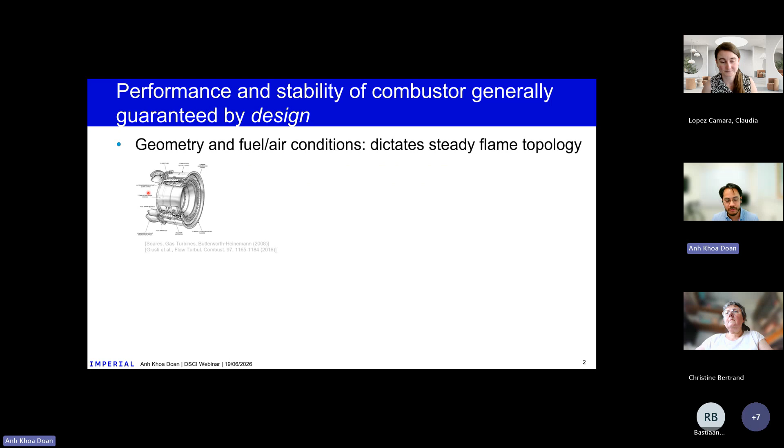In general, when we design combustors, we design their geometries and fuel-air conditions. For example, here we have an annular combustor, but the way we design it is that we design the fuel injection systems, the airflow systems, and the geometry of the combustor such that we obtain a stable flame with appropriate efficiency and power generation characteristics.

The thing is, once the combustor is designed, it is generally meant to operate in a relatively narrow range of fuel-air conditions and operating conditions. That means these kinds of combustors have limited adaptability to operating outside of their design conditions, or the conditions for which they were designed. So that's the situation we're in.

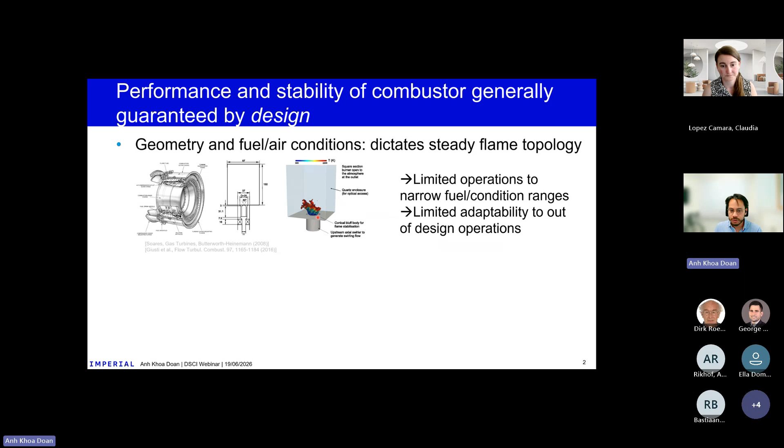In parallel to this, in relatively recent years there's been investigation into implementing some form of actuation available in combustors. For example, Pratt and Whitney are exploring adding steam injection into combustors to improve the efficiency and stability of hydrogen combustion. That gives us an extra degree of freedom while the combustor is operating, beyond just air-fuel ratio or injection speed.

This, for example, could be used to prevent potential flashback, which will be one of the topics of today's presentation. Another aspect recently investigated by a colleague at Imperial College, Andrea Giusti, is the potential of using an oscillating electric field to control the trajectories of charged fuel droplets. That can potentially give us control on specific fuel stratifications, which can then be leveraged for different kinds of geometries.

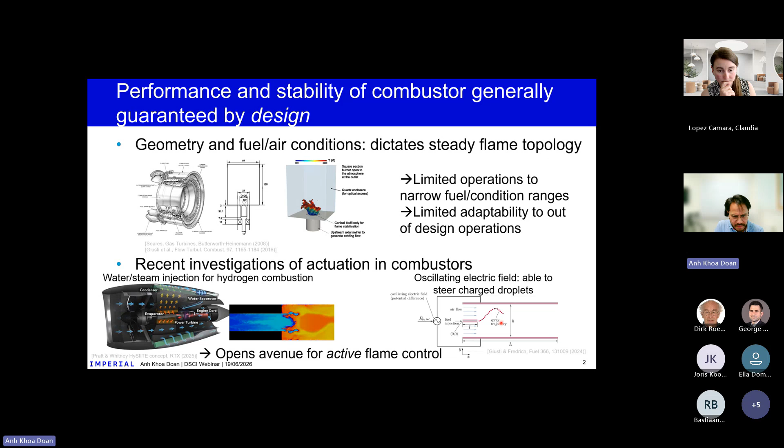So that sets the stage for potentially having means to actuate the flame beyond the point when the geometry has been set up. But there are many challenges before we can actually do that, because we encounter the natural challenges of turbulence and turbulent flames, where the dynamics is extremely complex due to the chaotic dynamics of turbulence and the interaction between chemistry and flow and turbulence, which is complex to predict.

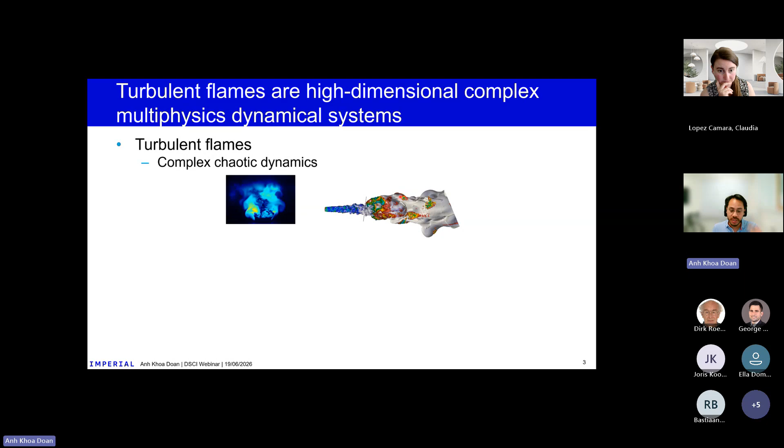In the context of future clean fuels, we have added complexity because hydrogen and ammonia can exhibit what I call extreme behaviors. For example, hydrogen is susceptible to flashback, and ammonia is susceptible to blow-off due to its low reactivity. So my research, and the topic of this presentation, addresses this combination of complexity in turbulent flames with sustainable fuels, which generally limits the performance that can be achieved using traditional control techniques.

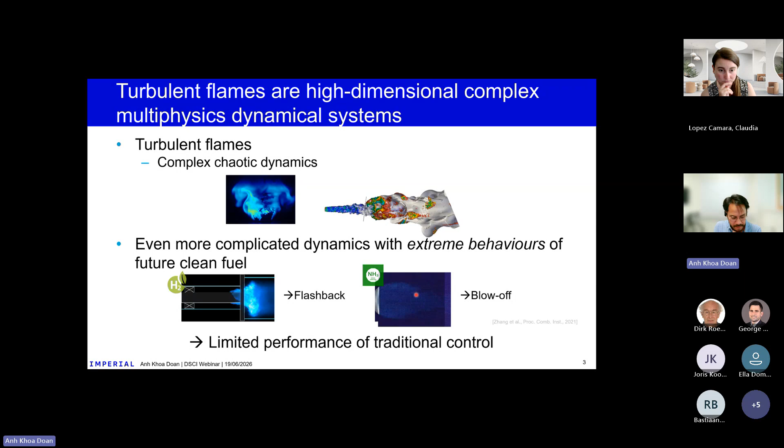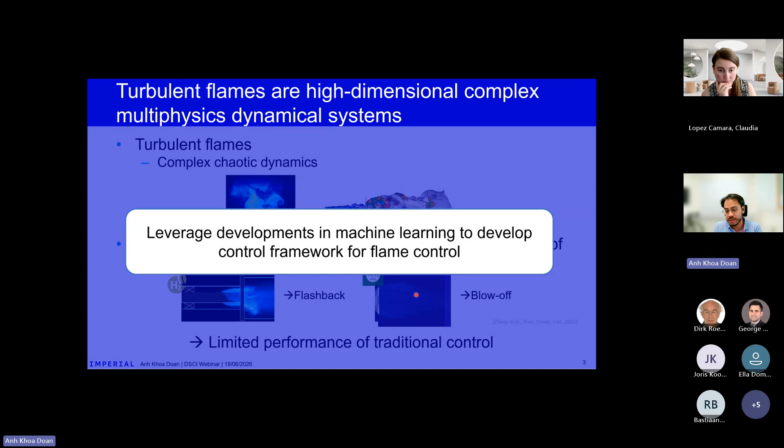So the objective of my talk and my research in general is to leverage these developments in machine learning techniques to try to develop control frameworks in this context of flame control, now that we have potentially some actuation possible in our combustors. So there will be 3 different topics.

The first one will be on the development of machine learning techniques to prevent flashback using water injection, as I've already mentioned. The second one will be related to how we can develop machine learning techniques to control the fuel stratification we obtain if we have charged droplets, meaning how we can control and find optimal electric field parameters. And the final one will be more on numerical developments where we try to develop a differentiable flow solver that can act as a unified control development framework for flame control.

So let me start with the first topic. This one has been done in collaboration with Mitna, Pablo, and Ivan Langella from TU Delft, and also our collaborator at IISc, Aditya Konduri.

So what do we look at in terms of flashback control? We have these combustors, meaning that, as I mentioned, I assume I have some actuators available in my combustor - some water injection systems. And if I have actuators, I have to have an idea of when I should activate them, which means I assume the presence of some measurements in our combustor.

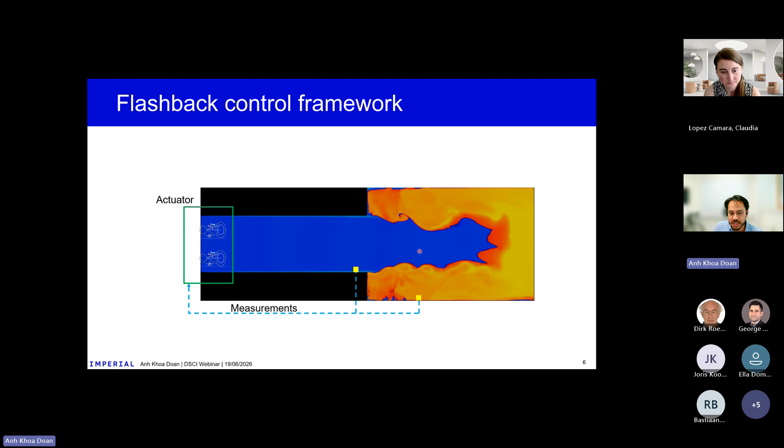So ideally, as you can see from this video, the objective is that we want to activate our water injection system in such a way that it prevents flashback from occurring. Let me restart the video here. You see here there was some high temperature that appeared, and here the water injection flushed that out appropriately.

But that brings us to some questions in terms of measurements: what do we need to measure so that we can anticipate the occurrence of flashback? And then if we can measure something that tells us flashback is going to occur, the question becomes how can we design optimal actuators so that they flush out flashback in the most efficient manner?

The first point is going to be tackled by presenting results on precursor identification techniques for flashback, which combine dimensionality reduction and clustering. And in terms of optimal design of water injection, that will be a Gaussian process regression-based optimization, GPR, of the water injection parameters.

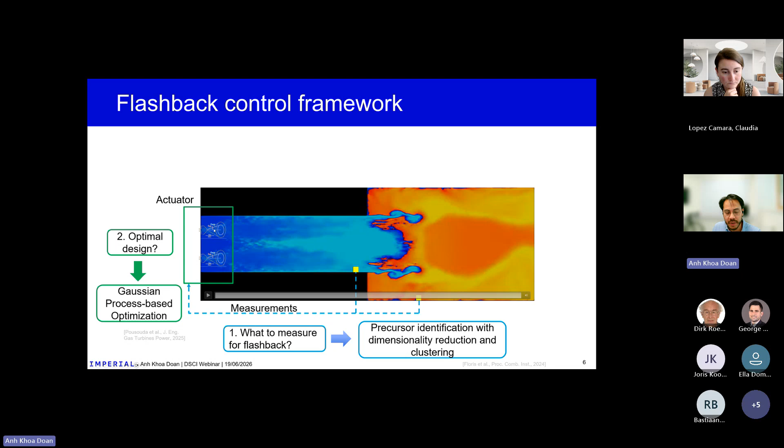So in which kind of configuration did we do this study? We looked at a simplified model of the second stage of an Ansaldo GT36 reheat combustor. In the second stage of that combustor, you have a highly preheated mixture, and that second stage is typically stabilized by autoignition. So you have this lean hydrogen mixture at relatively high pressure, and as I mentioned, it's reheated because it's a second stage burner.

Typically, this kind of configuration is designed so that your inlet velocity and the length of your duct are such that this heated mixture will autoignite, but the autoignition delay time means it only fully starts autoigniting after the area jump. The autoignition kernel only starts growing significantly after the area jump, then it grows in size, and because you have recirculation, the flame stabilizes downstream. So we performed simulations of these simplified geometries, similar to the second stage of this Ansaldo GT36 combustor, using LES and an 11 species mechanism.

So to summarize, that means we have 17 different features in our flow, which correspond at every grid point to the 11 species, the flow components, pressure, temperature, and density - that's it.

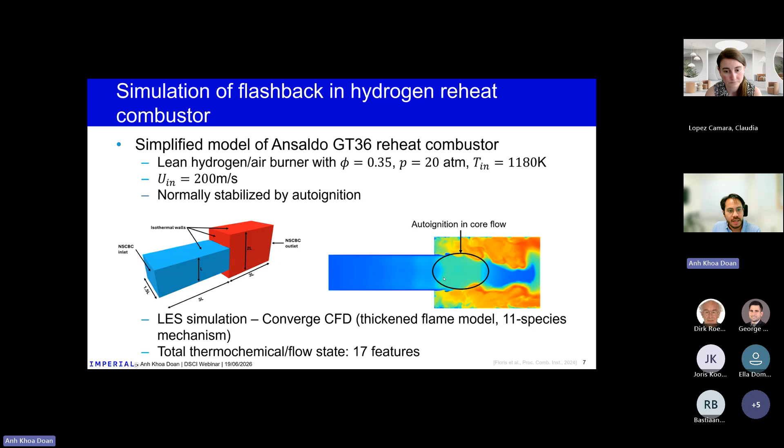So what we observe in our simulations is that this combustor showed what we would describe as intermittent flashbacks. So sometimes, despite having designed the length of our duct and knowing the autoignition delay time of the mixture, the autoignition kernel would actually appear upstream, resulting in a kernel that would grow in the duct and then enter the boundary layer, meaning the flame would progress into the injection system.

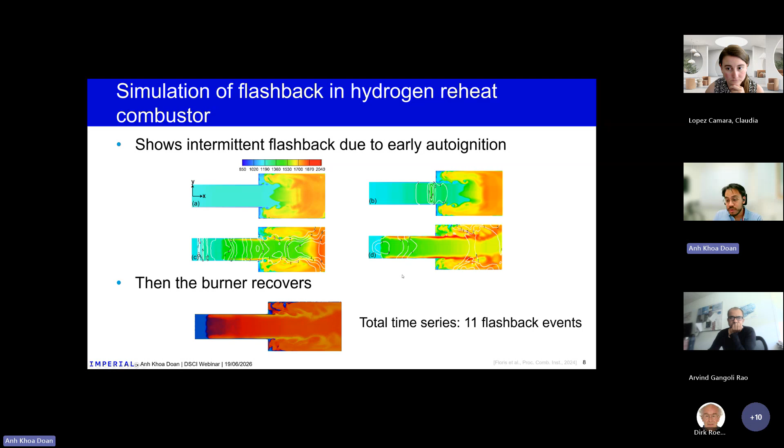But then the burner could recover because you had a high inlet velocity, and so we had this intermittent flashback that would actually occur in this combustor. We could simulate that continuously, and so we collected a time series of 11 flashbacks, asking ourselves: can I predict what is triggering this flashback event? And if I can find what is triggering those events, and what I can measure that tells me flashback is occurring, can we prevent it? So from our simulations, we just collected some time series in the burner.

As I mentioned, the objective of this first part is to identify precursors of this flashback, which means identifying the important features of my flow that are related to flashback and which will indicate to us that flashback is occurring. Once I know what the important physical features are to look at, I can try to find a set of specific quantities that tells us precursor flashback is going to occur - the precursors to this flashbacking event.

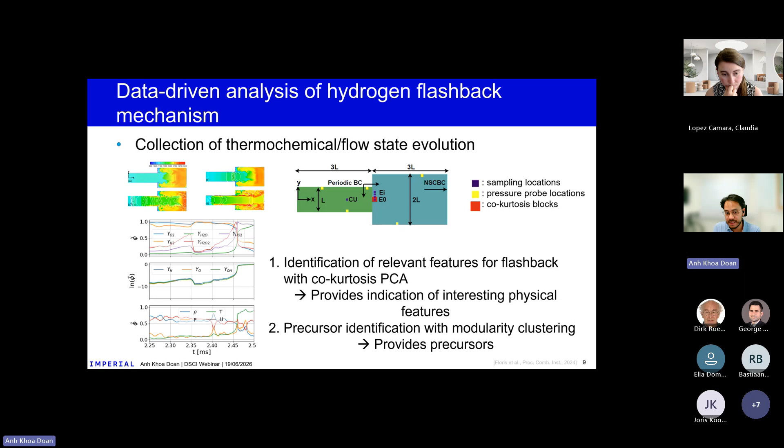So the first part is on what is called co-kurtosis PCA, where we try to identify, from all the thermochemical and flow states that we have, which ones are relevant in this mechanism of flashback. To do that, we use co-kurtosis PCA, a method developed by our collaborator at IISc. So what does it consist of?

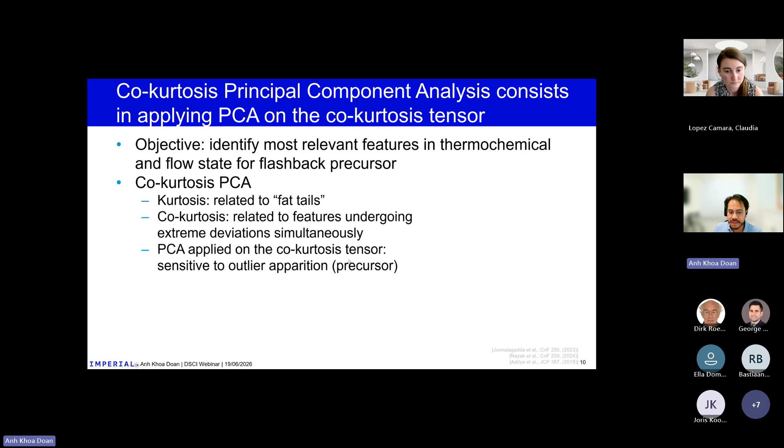Co-kurtosis PCA, as its name indicates, is first based on looking at the kurtosis - the fourth order moment, related to the presence of fat tails in the distributions of your quantities of interest. The co-kurtosis, now when you have multivariate distributions with multiple features, is related to whether multiple variables exhibit extreme values at the same time. Then you can apply PCA, principal component analysis - or in flow, we often use POD, which is basically the same - to your co-kurtosis tensor, and the principal components of that tensor are sensitive to the appearance of outliers.

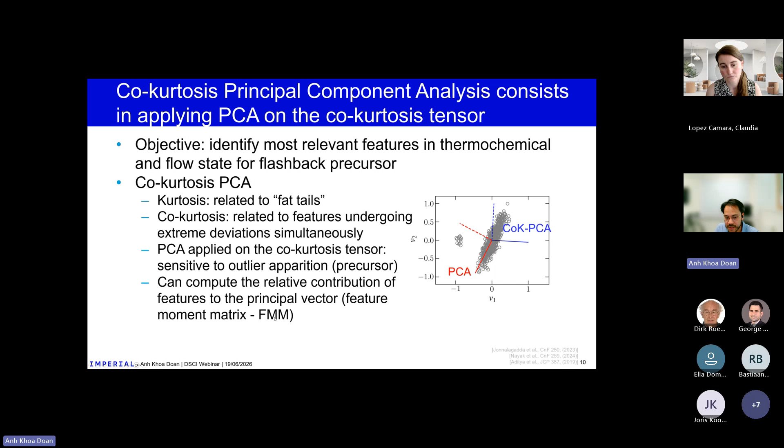So once you have this direction of your principal component of your co-kurtosis tensor, you can project the original features onto that direction and identify which of your original features align themselves, contribute the most, to that direction. In this case, we would see that V1 aligns itself quite well with this appearance, which would be indicative that V1 is a quantity relevant when we want to anticipate the appearance of these outliers in my dataset. These contributions of the original features to the direction of my principal component of the co-kurtosis tensor, we call the FMM - feature moment matrix.

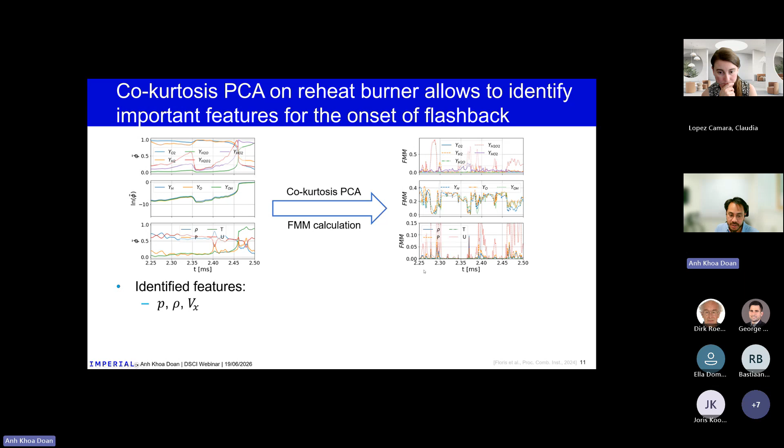We also saw that O, OH, and H show a very similar time series in terms of evolution. That means if you're just interested in capturing the essential dynamics of those FMMs, keeping only one of them would be sufficient. So we decided to keep OH as a feature to be analyzed further.

And then we saw a strong activity of the FMMs for HO2 and H2O2, which is somewhat to be expected, as we know that both of them are precursors to flashback, to autoignition, sorry.

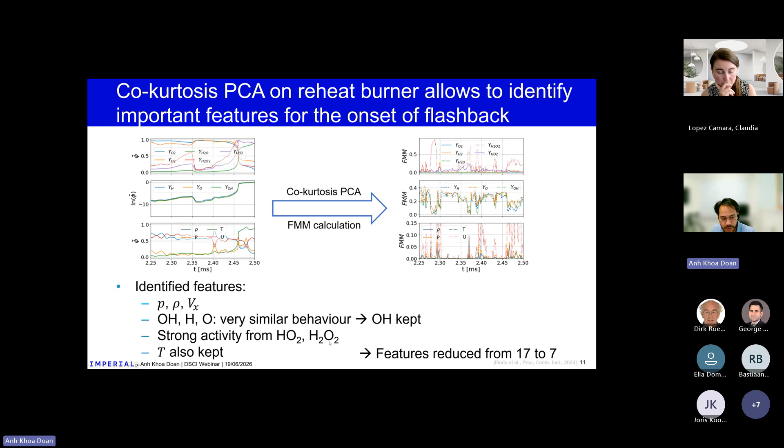We also additionally kept temperature because it's an easy marker of telling us whether the flame has actually gone past our sampling locations. So instead of having to analyze all the different quantities in our thermochemical and flow states, we could just look at those seven: pressure, density, streamwise velocity, OH, HO2, H2O2, and temperature. That reduces the analysis. So now we know what quantities we should be monitoring, so those seven.

How can we identify the specific combination of those quantities that will tell us a precursor is going to happen, knowing that potentially just setting threshold values might not be sufficient because we are in a turbulent environment, so you have natural fluctuations of those quantities.

To identify these specific conditions, we use clustering techniques based on graphs. There were a couple of early stage, preliminary steps to be done.

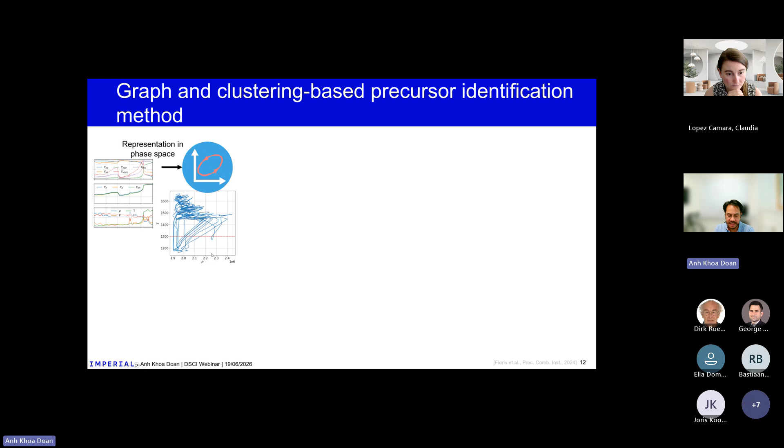First, from our time series of our quantities of interest, the seven that I mentioned, we can plot them in a 7-dimensional phase space, so the evolution in time of those 7 different quantities. Here they are just projected onto a temperature and pressure plane, but it's a 7-dimensional phase space. We can tessellate this phase space into small regions, small hypercubes, and we can then estimate from the data we have observed how often we see a transition from one hypercube to another in the observed dataset.

What you obtain from this analysis is what is called a transition probability matrix, where basically the element ij indicates the observed probability of transitioning from a given hypercube i to another hypercube j. It's obviously going to be mostly a strongly diagonal matrix, because within 2 consecutive time steps, your state has not evolved so much that you're directly moving to another hypercube.

So now that you have a transition probability matrix, you can interpret that as a graph, where every node represents a hypercube and the edge represents the probability of transitioning between 2 different hypercubes.

Now that we have a graph, we can apply clustering techniques dedicated to graphs. We use a technique called modularity-based clustering. The idea behind modularity-based clustering is to create clusters in this graph which have strong intra-connectivity and weak extra-connectivity. That means it's going to create strong clusters with many nodes strongly connected with each other, a lot of edges among themselves, and very few edges with other nodes of different clusters.

The rationale behind using that is that when you have a set of normal states, you're going to keep transitioning between normal states. So all those normal states and the hypercubes related to them will be strongly connected with each other. The extreme states will be living by themselves, because extreme states do not transition from one extreme to another extreme, so those would be their own clusters. And in the middle, there will be a set of clusters which connect your normal large cluster to your individual extreme clusters.

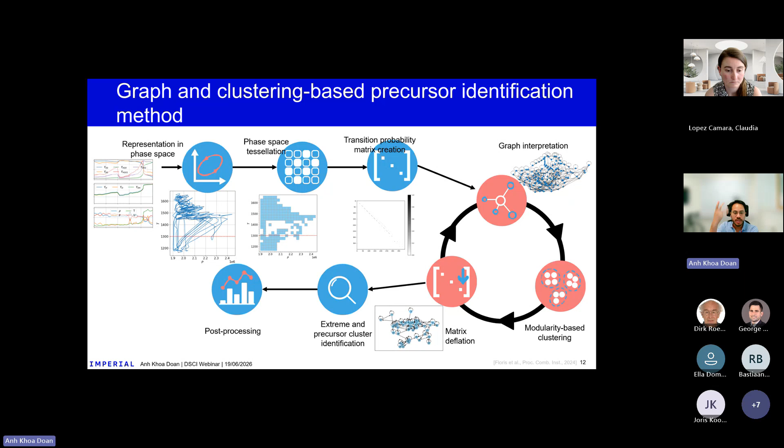So applying this to the data set I've presented of these flashbacking hydrogen flames, we had this evolution in the phase space. Unfortunately we cannot present this in a 7-dimensional space, but you can see the projection here in a temperature and pressure field showing the evolution in time. At the bottom left you would have your sets of normal clusters. The different points colored by the same color belong to the same cluster, and the number indicates the center of my cluster. Anyway, that's the clustering which has happened.

So this was the cluster obtained with just the first 3 flashback events. For the subsequent flashback, we can collect these 7 thermochemical states, these 7 features, and look at the value that I have at that moment. What is the cluster to which I am closest? Identify that, and depending on what kind of cluster that has been identified to be - normal, precursor, or extreme - I can ascribe the state of my system to the type of cluster to which it is closest. So this is what you're seeing here, where you have in time the background color.

So this is just the evolution of temperature at the sampling location, and the background color indicates in which kind of cluster I'm classifying my system to be. Background color blue means normal, background color red means extreme - that means flashback has occurred - and a color in between, orange or yellowish, means we are ascribed to be in a precursor cluster. You can see that we always identified the system to be in a precursor cluster before the extreme event, before the extreme state occurs, and that means we have observations that flashback might occur.

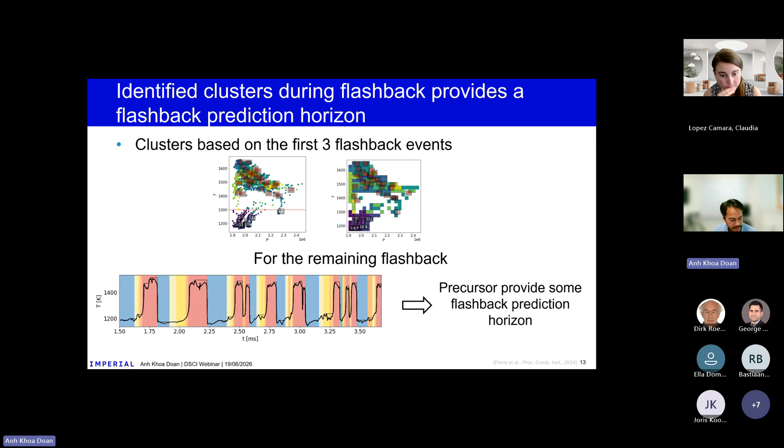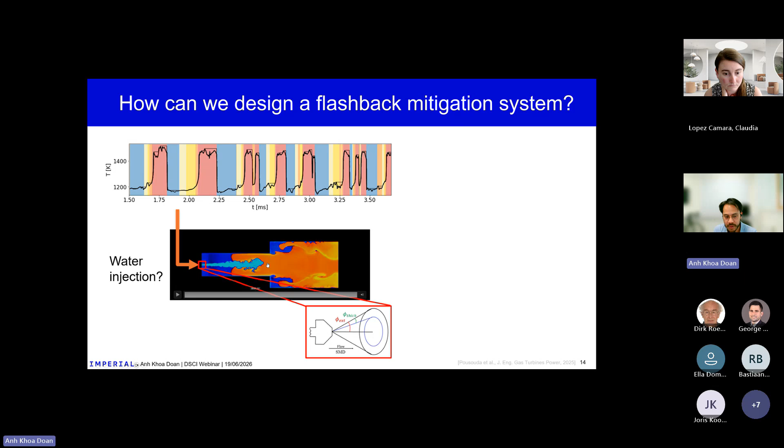Okay, so now that we have these precursor identification techniques, we know what to measure, so we can monitor the 7 states. That means now that we know flashback can occur at those moments, or that we have some lead time telling us flashback is going to occur, how can we design a water injection system that runs counter to flashback? Because obviously there are many different parameters that my water injection system can have, and not all of them will effectively prevent the flame from moving back upstream, as you can see from this video here. So the question is, how can we design this optimally?

So in these simulations, we consider water injection that has 4 different design variables: the water mass flow rate, the SMD - that's the diameter of your water droplets - and basically the cone angle around which you're going to inject the water.

So then the objective is to try to optimally design this water injection, which means we have to define some performance parameters. In this study we defined 5 different performance parameters. The first one being, well obviously, flashback had to be prevented, so that meant the flame should not have moved excessively back upstream.

We also had the thermal efficiency, because you want to inject water but you don't want to completely decrease the power, completely ruin the efficiency of your combustor, since ultimately the objective is to generate power. The evaporation rate of your water droplets, because you want to make sure you're not carrying water droplets all the way outside of your combustor, so they should be fully evaporated. Pattern factor is related to the uniformity of the temperature field at the exit of your combustor, because we want to avoid temperature inhomogeneities, and in the context of hydrogen combustion we wanted to minimize NOx emissions. So those were our 5 performance parameters.

And obviously we still have a relatively complex design space, because all those values can actually take a wide potential range for the 4 design variables. So we designed a surrogate model to obtain this link between the performance parameters and the design variables. How did we do that? We first generated a database of 20 simulations with different values of our design variables.

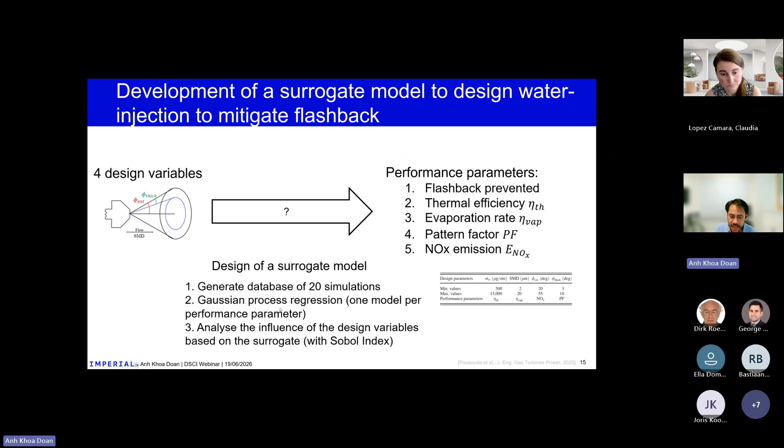With this database, we developed a surrogate model for each of these performance parameters using Gaussian process regression. In the interest of time, I won't get into the details of the process. Once you have this surrogate model, you can use it to analyze the influence of those design variables on those performance parameters.

These are called Sobol indices. The way to interpret the Sobol indices is that if you have a high value, that means this design variable is strongly influential on this specific performance parameter.

For example, here we can see that the thermal efficiency is mostly influenced by the water mass flow rate, m_w, which is somewhat expected, because the more water you inject into your system, the more it's going to take heat away from your combustion, which would affect the thermal efficiency of your combustor. So we can look at other performance parameters and Sobol indices.

You can see, for example, that the NOx emissions are influenced jointly by your water mass flow rate, the SMD, and the cone angle of your water injector, which again somewhat makes sense, since NOx is only influenced by temperature.

So if you inject more water, depending on the diameter of your water droplets, they might take more or less heat, and also other aspects like pattern factor. But basically, all of this you can analyze, and from a physical perspective, this dependency that the surrogate model had captured somewhat makes sense.

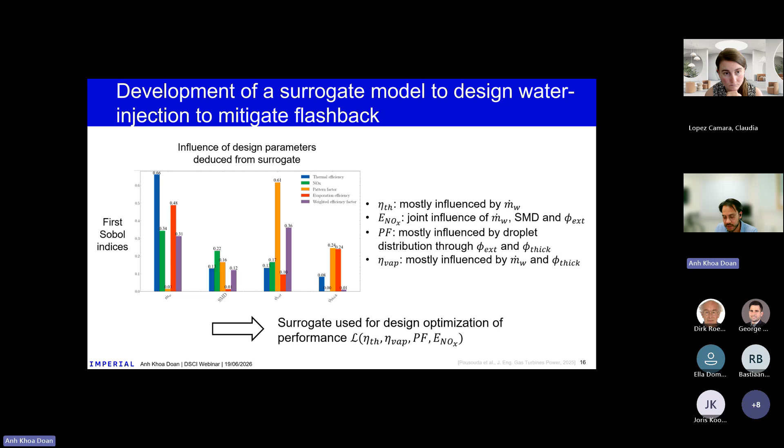So that gives some confidence in using these surrogate models to find an optimal design for our water injection systems. We can use these surrogates to optimize the design variables based on this surrogate model, which is based on Gaussian process regression, and is much cheaper to estimate than performing multiple full high-fidelity LES simulations.

So that gives us an optimal design for water injection, and I'd like to show what happens when you have that. This is the simulation, the evolution of what happens in our flashback-prone combustors during a flashback.

If you remember from the co-kurtosis PCA, pressure was indicated to be a strongly important feature to look at in the context of flashback. You can see that indeed, during your flashback events, there seems to be an increase in pressure, related to pressure waves propagating upstream in our domain, which then locally increase your temperature, decreasing your auto-ignition delay time, and that led to flashback.

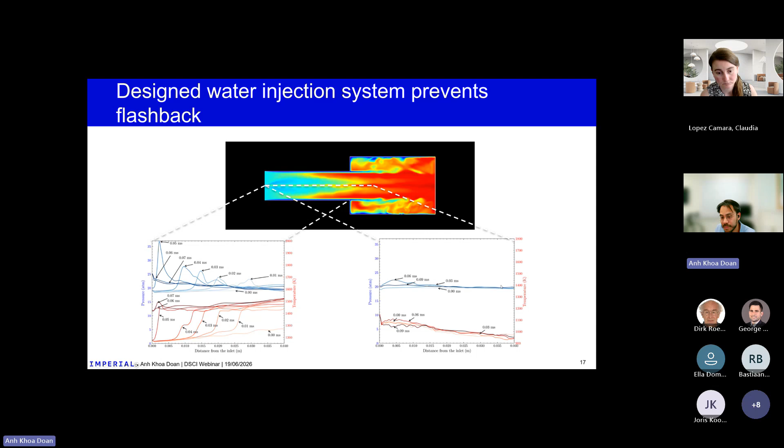So once we activate this water injection system, this is what happens. Along the same regions here, the water injection manages to damp this increase in pressure and prevents flashback from occurring.

So that was this first illustration on how we could use machine learning techniques to identify precursors to flashback, and how to use machine learning to find a surrogate model for the water injection system.

So now the second one is on machine learning techniques to control fuel stratification with electric fields. This work was done in collaboration with Andrea Giusti and Nav from Imperial College, and also my PhD student Babak from TU Delft. This work is going to be presented at the symposium in Kyoto.

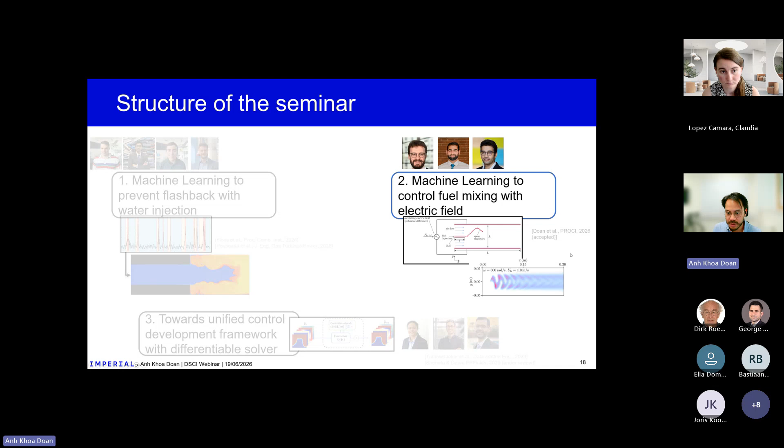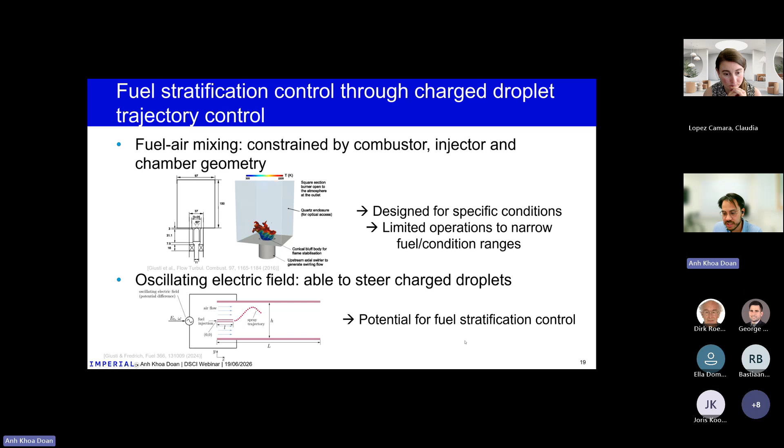Coming back to our problem, in general, combustors are designed for given geometries and conditions. Here we have the ability, after the geometry has been fixed, to modulate the oscillating electric field so that you can control the trajectories of your charged droplets, which then potentially gives the opportunity of controlling the resulting fuel stratification.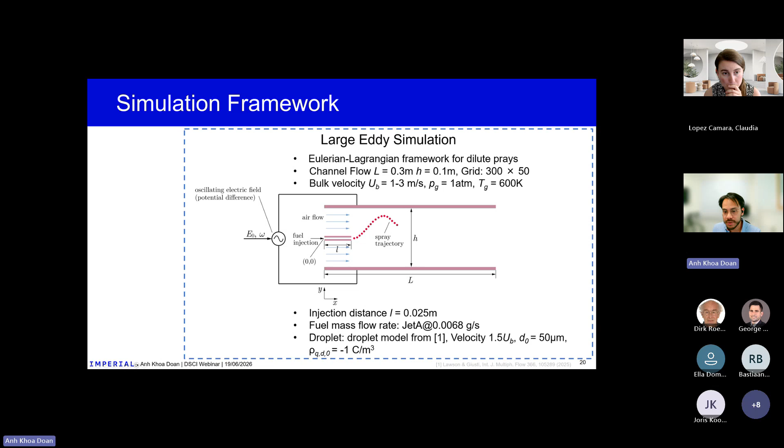So first, without any control, we can analyze what happens in terms of fuel mass fractions when we have different values of this electric field. This is an example of a base simulation, where the droplets are injected at this location here, and they propagate under the influence of the bulk velocity.

For these specific conditions of magnitude and frequency of your oscillating electric field, you see this pattern of fuel mass fractions, which is oscillating because your droplets are basically oscillating under the influence of your oscillating electric field. As they propagate downstream, they naturally evaporate, creating this sort of mist of fuel mass fraction at the outlet.

So you can play around with different parameters. For example, if you increase the bulk velocity, you have an increase in the wavelength in the streamwise direction of your fuel mass fraction, which is to be expected as your droplet moves faster in the streamwise direction.

If you increase the frequency of your oscillating electric field, you see that the magnitude in the spanwise direction—this is a channel flow—of your droplets decreases, and similarly in the streamwise direction this also decreases, and you can see that it creates a more uniform fuel mass fraction profile at the exit here.

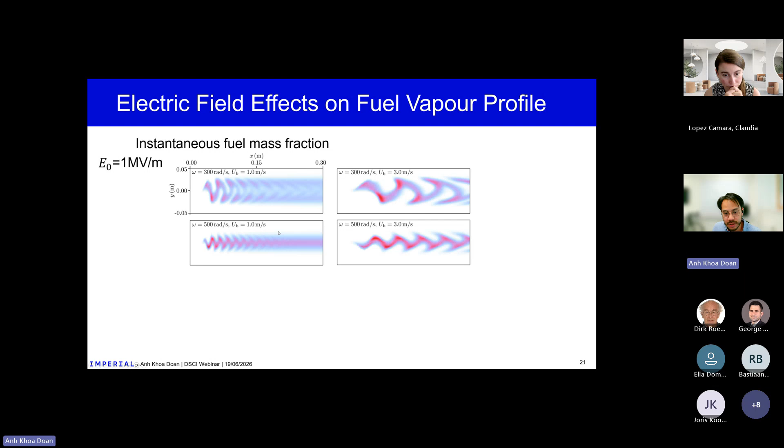And if you compound the two effects, increasing both the frequency of the oscillating electric field and your bulk velocity, you have a compounded effect of both. So this gives some base physical insight into this mechanism.

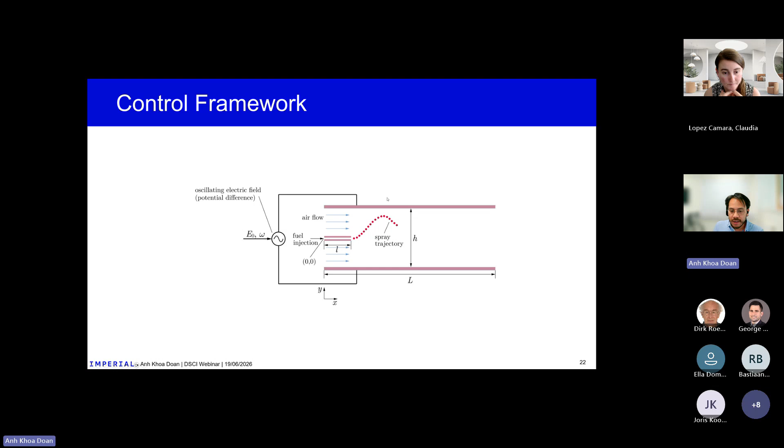So from these simulations, we want to perform some control. As I mentioned, the objective may be to look at your fuel stratifications, or to control your fuel stratifications coming out of this premixing stage, fuel preparation stage. And so you need to define a target for control.

In this case, we basically define a set of fuel mass fraction profiles at the exit, which we would consider as the ones that we want to achieve under the control of this oscillating electric field. So we define families of fuel vapor profiles depending on two parameters, Y0 and delta.

Y0 governs the width of this fuel mass fraction profile, and delta controls the steepness of the transition between your fuel-containing regions and the outer regions in the channel.

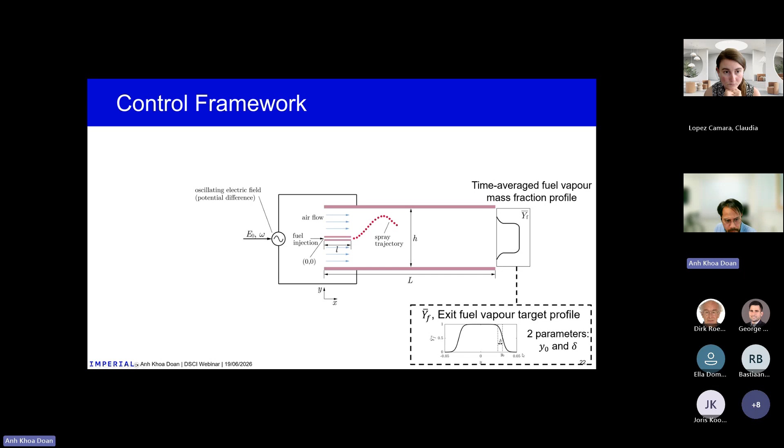Now that we have our given target, we have to define our control system, our control environment. In this case, we use what is called single-step deep reinforcement learning to identify optimal control parameters for this oscillating electric field. In SDRL, you have a neural network which defines the policy, which is going to set your control parameters—in this case, the frequency and the magnitude of this electric oscillating field.

The way it identifies optimal values is through what is called policy training. So what happens here is that you give the target profile that you want—two parameters, Y0 and delta, that define to you a target profile.

You need to measure what is the profile that you achieve, YF bar here. The difference between the two gives you a reward, an estimate of what is called a reward function. You can just see that as being inversely proportional to the difference between the two—so if they are perfect, that means your reward is maximized.

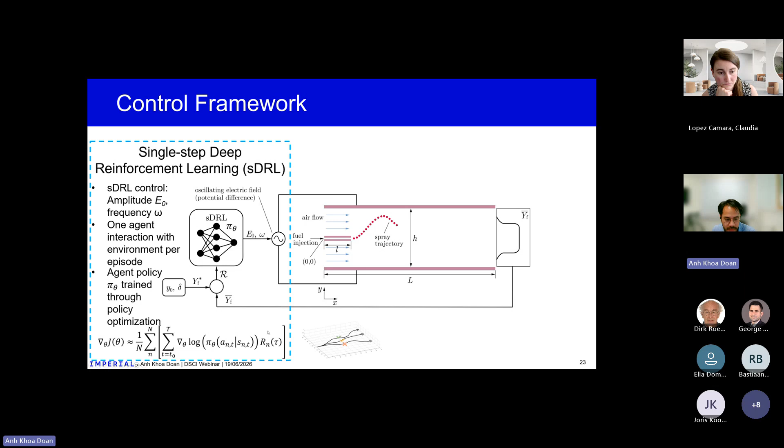And then with these values of reward across multiple trials, it's going to approximate the dependency and relationship between the target profiles and the parameters of your oscillating electric field. The way it approximates this is through batch trainings of multiple simulations with different parameters, collecting together the values of rewards, and then identifying how to modify its policy to move towards higher reward.

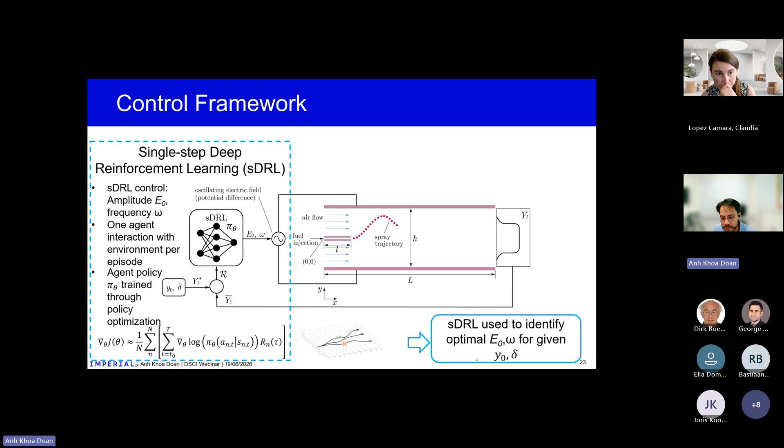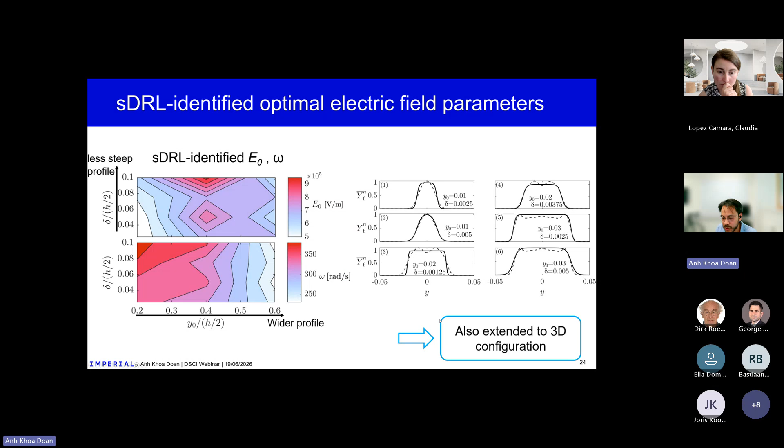Obviously, there are some profiles which are less well reproduced than others, but those are related to the limited control authority that we have with just two parameters for the electric field. So this is shown here in 2D, but in the proceedings paper, we also show how we extended this to a 3D configuration.

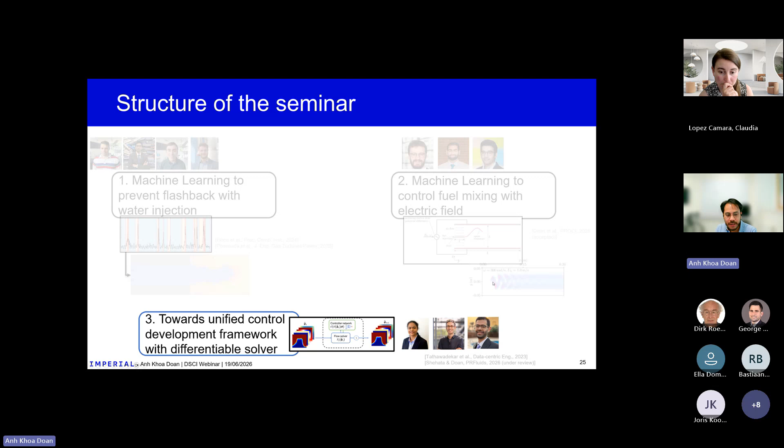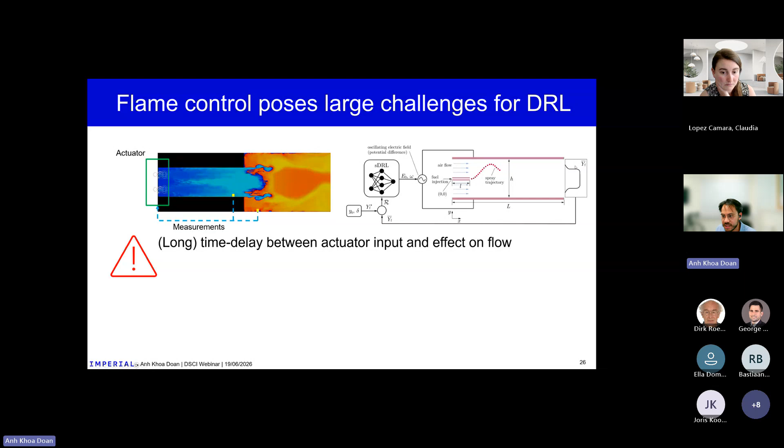A commonality that you see in these two control frameworks that I've presented is that there's a long time delay between when you start your actuations and when you measure whether the actuation has had a strong influence. Here, it takes some time for water to reach your auto-ignition regions. And here you have to wait for your droplets to go through the entire domain before you can collect the fuel mass fraction profile at the exit.

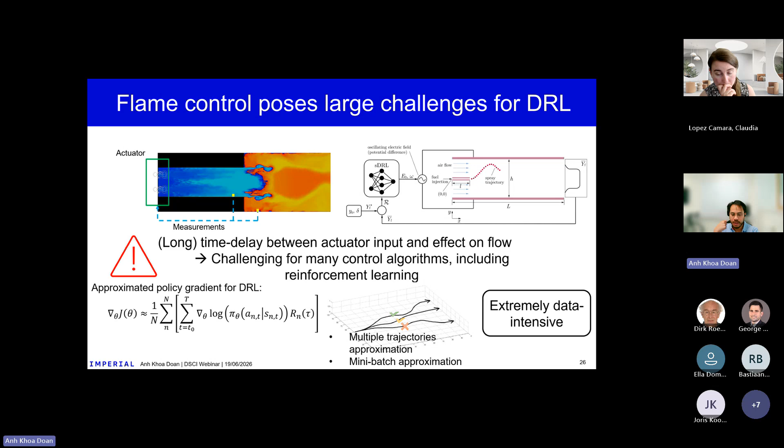That can be extremely expensive for machine learning because you have to accumulate information over a long time dependency. So to compensate for that, there's a series of solvers called differentiable solvers. They are effective and efficient in that they provide what's called automatic differentiation. Simply put, if you have a differentiable flow solver, you have the availability of all the gradients of all your variables with respect to other variables present in your solver, and that gradient is easy and cheap to compute.

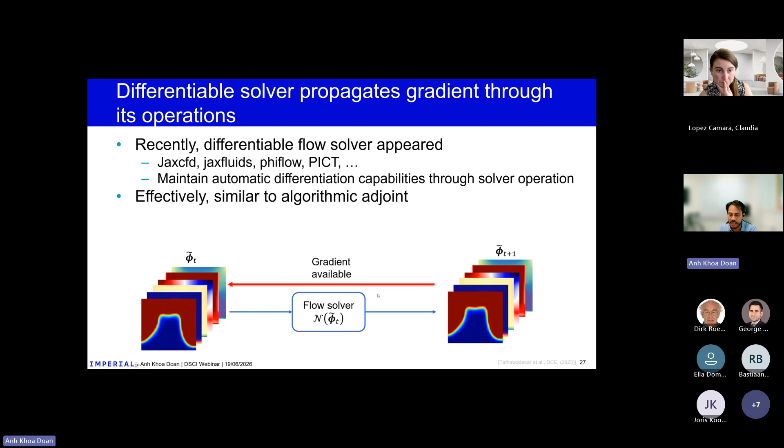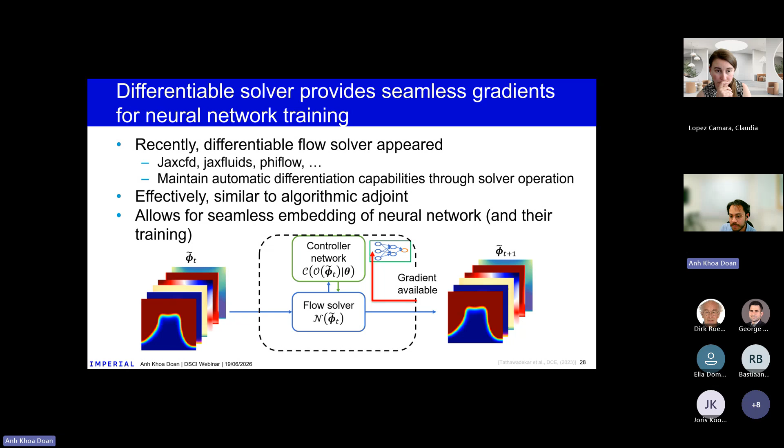In the context of a control framework, typically your controller sets the values of your boundary conditions in your flow solver. To optimize this controller, now that you have a differentiable flow solver, you have the gradient of your future flow state with respect to your controller network readily available. That gives the opportunity to naturally optimize your controller, which can be represented by a neural network. That's basically what a differentiable flow solver provides.

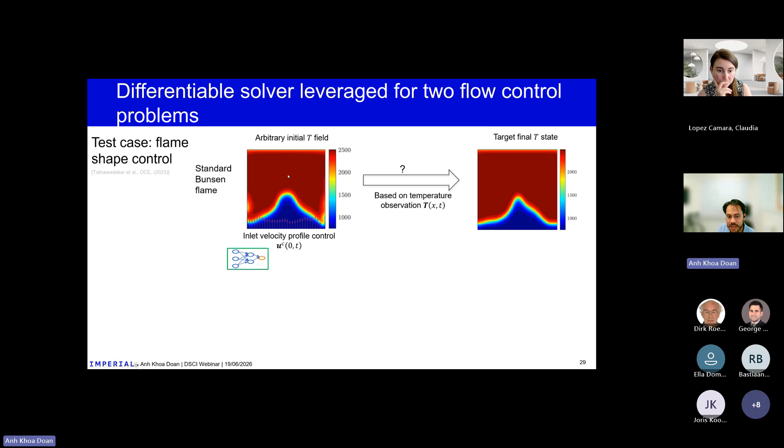We use this in some canonical problems. In this problem, which we call a flame shape control problem, the objective was to find a controller that would identify the inlet velocity needed to go from an initial temperature field towards a target temperature field. This is a standard Bunsen flame.

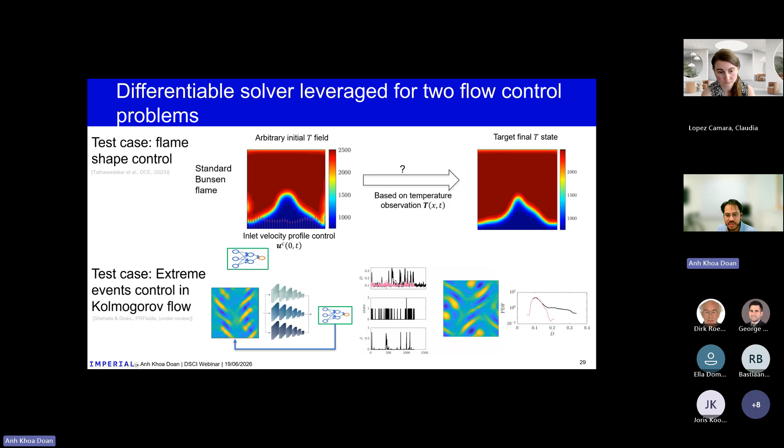We also did the same in the context of extreme events in the 2D Kolmogorov flow. This is a non-reacting flow profile, and the objective was for the controller network to find an optimal forcing that would only be active before extreme dissipation events. We showed that we could decrease the occurrence of these extreme dissipation events in the Kolmogorov flow. So this was just to briefly touch upon what can be done with a differentiable flow solver.

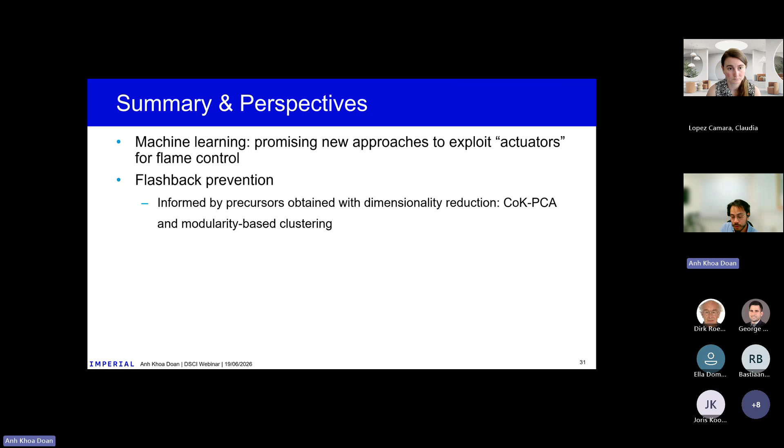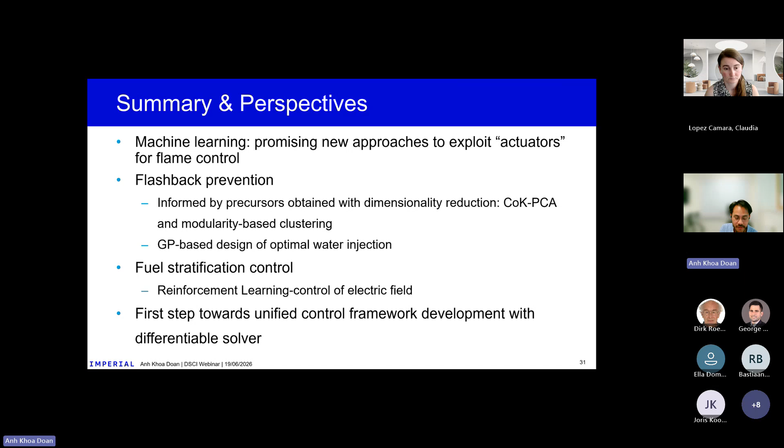To conclude, we have seen some machine learning techniques that can help develop control frameworks for flame controls, since we now potentially have actuators in combustors. We showed this in terms of flashback prevention, using a combination of co-kurtosis PCA and modularity-based clustering to identify precursors. Once we had precursors, we used Gaussian process regression-based techniques to optimally design the water injection system. In terms of fuel stratification control, we showed how reinforcement learning could control the electric field parameters to achieve desired fuel stratifications, and we also very briefly discussed how we can use a differentiable flow solver to improve control strategies.

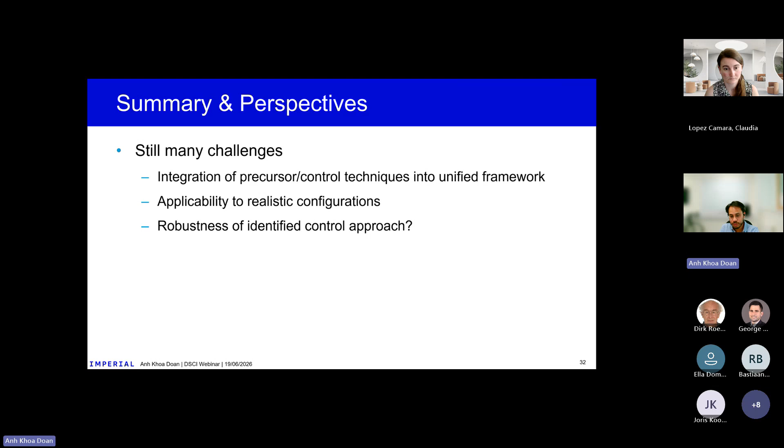But there's still a lot of work to be done. All the examples I've shown were developed separately — precursors were developed in one stage, and the control was developed in a different stage. Ideally, you would control everything in a unified framework, which could be done with this differentiable flow solver. All the geometries shown here are extremely simplistic, so moving toward more realistic configurations is still to be explored, as is the robustness of these control techniques in more complex environments with turbulence and other effects.